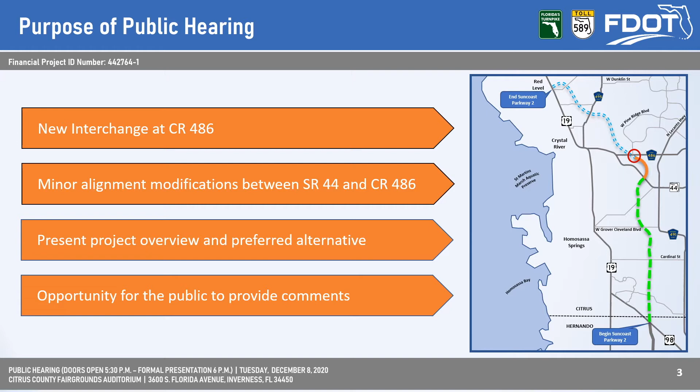All hearing attendees will be able to watch the live-streamed formal presentation. The purpose of the public hearing is to share information with the public about the preferred alternative, the proposed new interchange at County Road 486, and the minor roadway alignment modifications between State Road 44 and County Road 486. The hearing will provide an opportunity for the public to comment on the preferred alternative for the project.

Every FDOT project goes through several project phases. Together, these phases are called the project development process. Currently, for this project, we are in the design and reevaluation phase, indicated by the red arrow.

During the project's planning phase, FDOT and local governments conducted ongoing long-range transportation planning to identify and prioritize individual projects. During the Project Development and Environment, or PD&E study, numerous alternatives and their potential social and environmental effects were examined. During the design and reevaluation phase, detailed construction plans are prepared. The right-of-way acquisition phase is when additional property needed for construction is purchased.

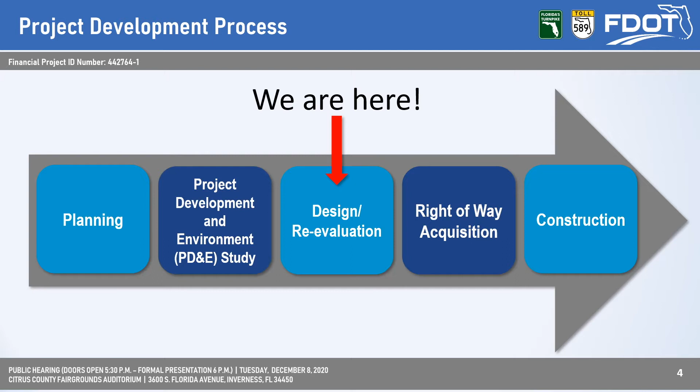The Suncoast Parkway 2 Phase 2 design project schedule is tentative and subject to change. The final design phase began in January 2019. Public input received at the public meeting held on January 23, 2020 has been reviewed. Design updates have been incorporated into the plans where feasible. Final plans are anticipated to be completed by fall 2022, and construction is anticipated to begin in late 2022.

The Suncoast Parkway 2 is a planned 4-lane tolled roadway that will extend 26 miles from US 98 in Hernando County to US 19 in Citrus County. The Suncoast Parkway 2 is divided into 3 phases. Phase 1 is currently under construction from US 98 to State Road 44 in Lecanto. Phase 2 will extend from State Road 44 to County Road 486, a distance of approximately 3 miles.

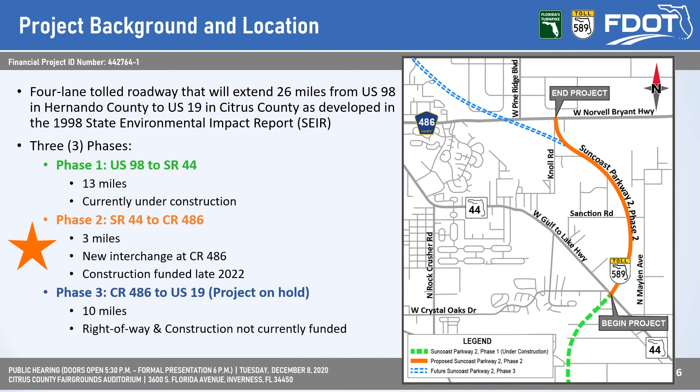This phase will complete the interchange at State Road 44 and construct an interchange at County Road 486. Phase 3, from County Road 486 to US 19, is not currently funded. All work on this phase is currently on hold.

The proposed typical section will provide 4 12-foot wide travel lanes, 2 in each direction, with 8-foot wide paved shoulders on the inside, 12-foot wide shoulders on the outside, and a grass median. The proposed limited access right-of-way for the road will be 300 feet in width. A 12-foot wide multi-use trail will also be constructed along the west side of the Suncoast Parkway. The right-of-way for the multi-use trail will be 50 feet wide.

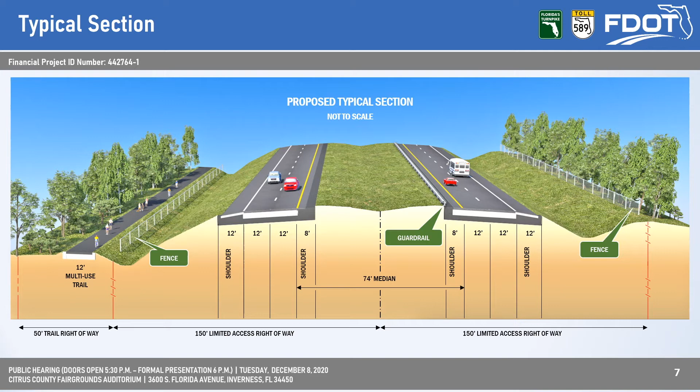Stormwater facilities will be constructed along both sides of the roadway. The preferred alternative will extend Suncoast Parkway 2, State Road 589, over State Road 44 and continue onto existing Knoll Road and County Road 486. The project will complete the State Road 44 Diamond Interchange.

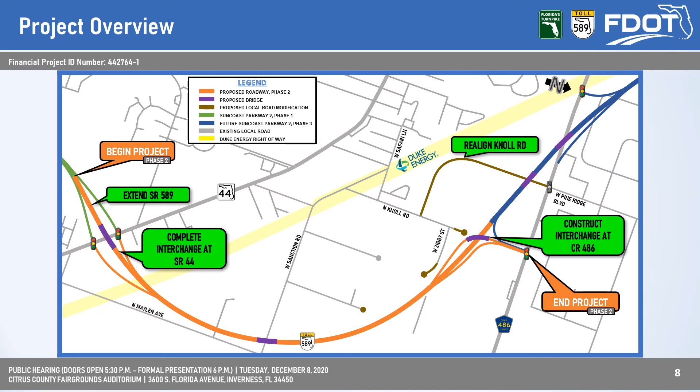The preferred alternative provides a northbound off-ramp to County Road 486 and a southbound on-ramp which bridges over the new Suncoast Parkway 2 travel lanes. Existing Knoll Road will be realigned to intersect with County Road 486 opposite Pine Ridge Boulevard. Local roads will be modified as needed to maintain access to area properties.

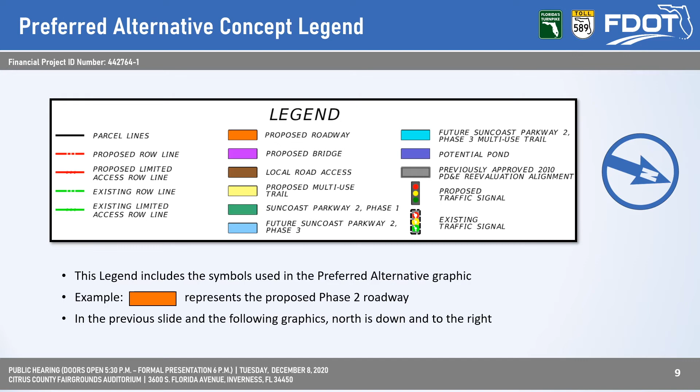This legend is shown in the preferred alternative slides for ease of reference. The purpose of the legend is to assist in understanding the colors and symbols on the following slides, which illustrate the preferred alternative. For example, the color orange is used to represent the proposed Suncoast Parkway 2 roadway that will be constructed as part of this project. The north arrow shown here, pointing down and to the right, is shown on each of the following slides, maintaining this same orientation throughout.

This slide shows the preferred alternative relative to the existing local roads, properties, and previously approved alignment, which was developed as part of the State Environmental Impact Report, or SEIR, reevaluation approved in 2010, shown in gray. North is down and to the right in this exhibit, making the top and bottom west and east of the Suncoast Parkway 2, respectively. This orientation is maintained in the following slides.

The proposed Suncoast Parkway 2 Phase 2 roadway is shown in orange, tying into Phase 1, shown in green, at State Road 44, and terminating at County Road 486, where the future Phase 3 extension is shown in blue. Phase 3 is currently not funded for construction and is on hold. Bridges at State Road 44, West Sanction Road, and the southbound on-ramp from County Road 486 will be constructed by this project and are shown in purple. Bridges associated with Phase 3 that are captured in this slide are also shown in purple, but Phase 3 bridges will not be constructed as part of this project.

Proposed right-of-way lines are shown in red, and potential pond sites are shown in dark blue to illustrate potential impacts to adjacent properties. The proposed toll site location is shown using a lime green box. Existing and proposed signalized intersections are identified with traffic signal symbols as denoted in the legend. Local roads being modified as part of this project are depicted in brown. Adjacent local roads are labeled in white and light blue. Select local businesses and landmarks are called out in black and white.

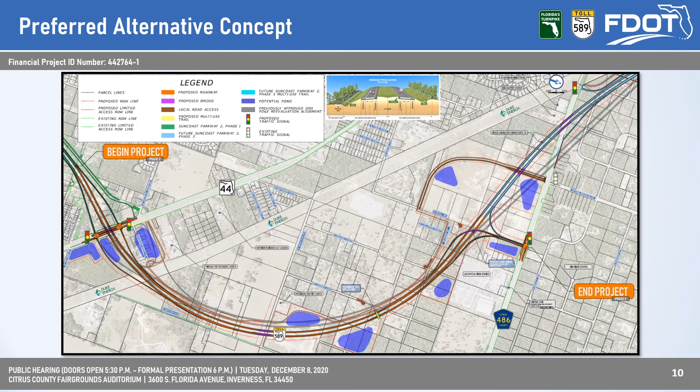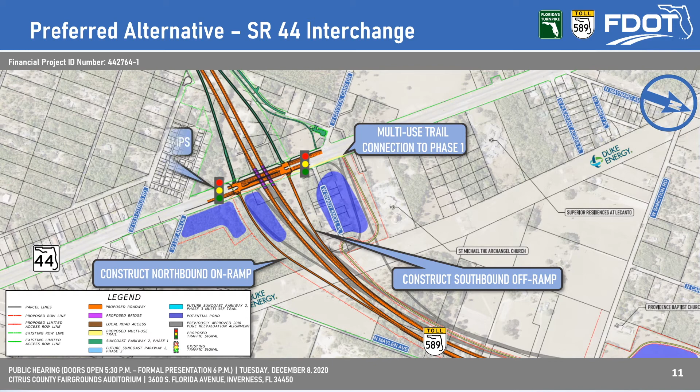The Diamond Interchange at State Road 44 will be completed with this project. Mainline Suncoast Parkway 2 will bridge over State Road 44 with a signalized northbound on-ramp and southbound off-ramp. The proposed 12 feet wide multi-use trail will connect to Phase 1, making use of the proposed signalized intersection. The preferred alternative provides a northbound off-ramp to County Road 486 and a southbound on-ramp, which bridges over the new Suncoast Parkway 2 travel lanes.

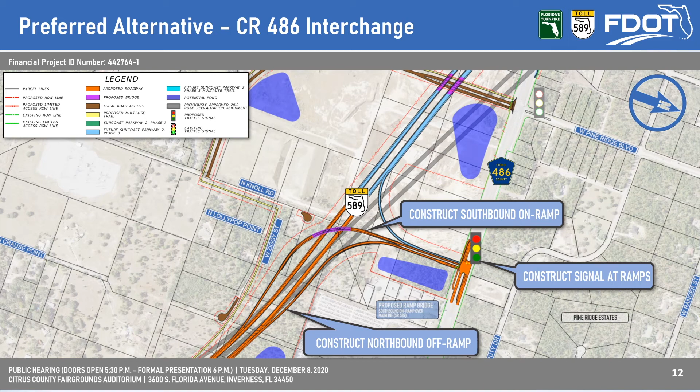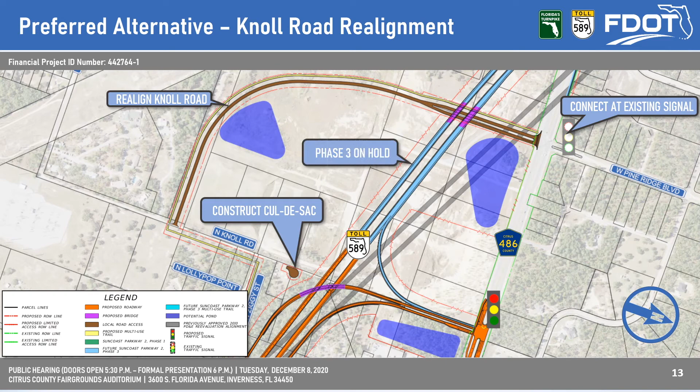This proposed interchange is located at existing Knoll Road, which will be realigned. There will be no direct connection between Suncoast Parkway 2 and Pine Ridge Estates. The recommended interchange alternatives require Knoll Road be realigned. A cul-de-sac will be constructed south of the proposed Suncoast Parkway 2, and the realignment will connect to County Road 486 across from West Pine Ridge Boulevard. The extension of Suncoast Parkway 2, Phase 3, is currently on hold.

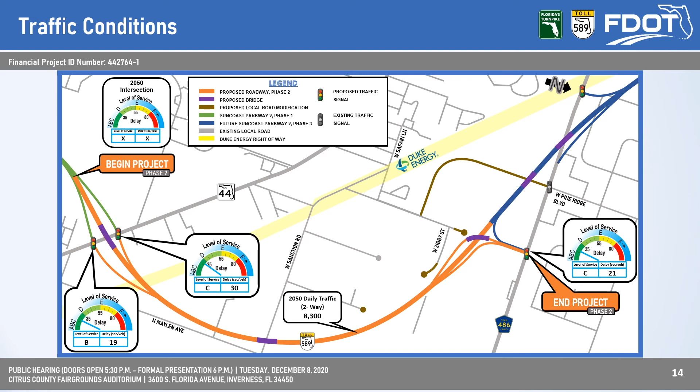The projected traffic conditions for the 2050 design year are shown here. A projected level of service, or LOS, and anticipated delay in seconds per vehicle is provided at each of the proposed signalized intersections to be constructed as part of this project. Level of service is a term used to qualitatively describe the operating conditions of a roadway based on factors such as speed, travel time, maneuverability, delay, and safety. It is identified using letters A through F, with A being the best, or free flow, and F being the worst, or forced flow or breakdown.

Draft documents will be made available to review before and after the public hearing. These documents can be reviewed digitally at the project website, suncoast2.com, or in person at the Central Ridge Library and the Coastal Region Library. Individuals who register online can provide written comments at the time of registration.